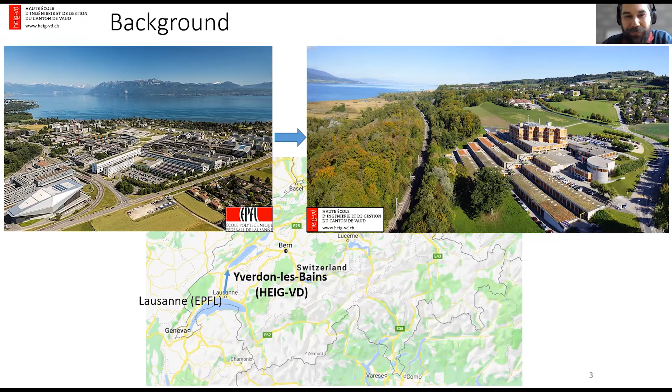Maybe I will start with a small background about geography, so that you can see more or less from where I'm talking today. So if we zoom in this small rectangle, there is Switzerland, a very small country. And if you zoom in again, you have my first affiliation here, EPFL in Lausanne, where I worked about 15 years with Professor Botsis on the border of the nice lake of Geneva. And then I shifted to the next lake north from that place, to Yverdon-les-Bains, here in the University of Applied Sciences in 2018. I moved from a relatively large university to a much smaller one.

Our University of Applied Sciences is actually multiple sites. The one in Yverdon-les-Bains is about 1,600 students, mostly at the bachelor level. But the University of Applied Sciences has a lot of other sites, and totally it's about 20,000 students. Most of our students are coming from a practical background, not necessarily oriented towards research initially, but we go also to master studies and PhD, also supervised PhDs.

I'm working in the Institute of Mechanical Design and Material Technologies, where we are about 10 professors and teachers, about 30 engineers full-time. We work very closely with industry in mechanical design, typically high-speed machines and dynamics, material characterization and non-destructive testing, and more recently, also additive manufacturing, where I also contribute.

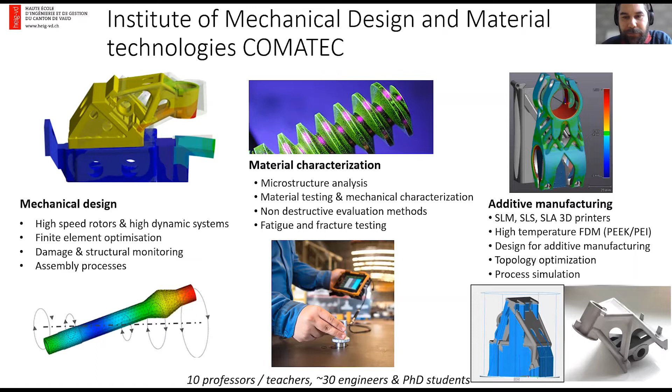Finally, in my group, we are currently 7 engineers working. About 2/3 of our projects are with the industry, so a lot of things that are confidential that I cannot show today. But we work in the field of 3D printing of composites, automated tape layup or in-situ consolidation of thermoplastic composites, also biocomposites, and the topic of today, thin-ply composites and multifunctional structures. We also develop design tools and optimization methods. But that's just the overview of what we are doing.

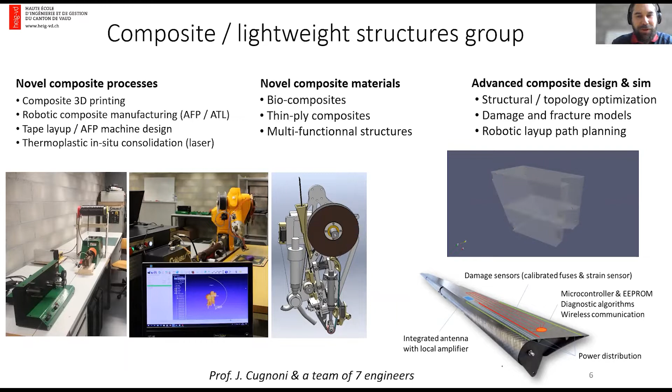Today we are focusing on this topic of thin-ply and multifunctional structures. The presentation will be structured in the following way: we'll have a look at what thin-ply composites are and why they are interesting. We look at their properties, mechanical properties mostly, and how we can model thin-ply composites. Finally, some applications. I will finish with what I see as an extension of this work: development of multifunctional thin-ply structures that can further save weight for weight-critical applications.

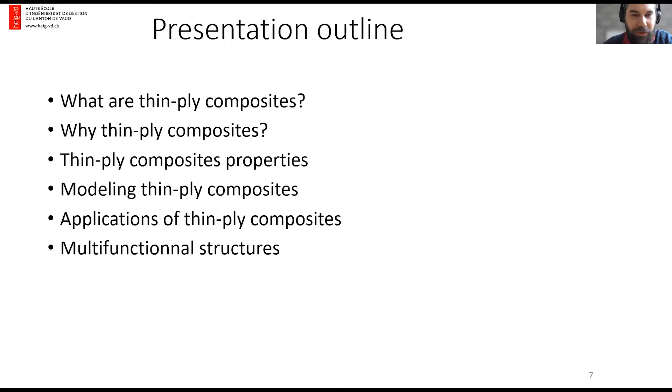So you probably all have seen this picture once in your life. It's the distribution of materials in the latest generation of aircrafts. We can see that in the latest generation of long-range aircrafts, we have about 50% weight of composite in the structure, and with other optimizations, it led to a 20% reduction in fuel consumption. This is a huge step. However, this evolution took about 40 years to introduce that amount of composites in aircrafts.

And the big question, with the need to go to more efficient transportation systems, is: can we go any further in the weight reduction of an aircraft structure, or other types of flying objects, for example? And I think that thin-ply is part of the solutions that we can investigate to achieve that.

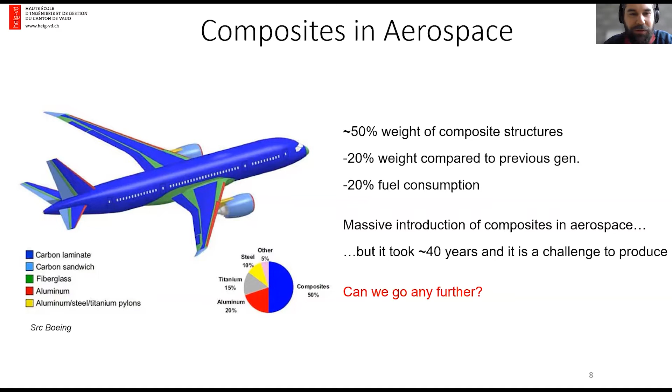And I will try to show you why and how.

So Thin-Ply Composites, first of all, a definition. These are composites made of plies that are typically 30 to 70 micrometer thick, so way thinner than the standard ply thicknesses we can find today in the industry.

Ply thickness can go down to 20 to even 15 micrometer, depending on the material. It's made by advanced tow spreading process, where typically carbon fiber tows are spread very thinly to a few fiber diameter thickness, and then impregnated or stabilized to do non-crimp fabric, for example.

These materials are commercially available, not necessarily widespread, but commercially available. It was first developed in Japan, in the center Fukui, but we also worked very closely in Switzerland with NTPT, North Thin-Ply Technology, which is specialized in Thin-Ply prepregs. There's also Chomarat in France and Oxeon, which are also producing Thin-Ply non-crimp fabrics or woven fabrics.

So the difficulty also when ply thickness is reduced as much is if we handle it as a prepreg or a textile, it's not very stable when we handle it. So it's ideally suited to be used using automated tape layup system and robotic processes, because laying it by hand is relatively difficult.

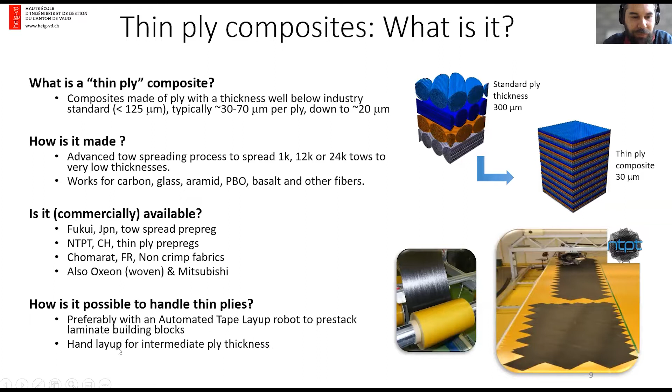But why? Why do we want to reduce the ply thickness? The first and probably most obvious reason is that a thinner ply means a thinner laminate can be produced. And that's typically critical for sandwich structures, for example, in space application, where the skin thickness of a sandwich usually is over-designed.

Usually the skin thickness is more designed based on the symmetry and balance conditions for the laminates, and it might not be critical in strength. So in these cases, which are very frequent, using a thinner ply means simply we can reduce the skin thickness and save weight by a significant margin.

For example, for a thin aerospace sandwich skin, we could move from about 1.2 millimeter thick skin, if we consider a quasi-isotropic laminate, down to a skin of 120 micron or even less, which means very close to paper thin skins, and still symmetric and balanced.

And for another type of advantage based on the design flexibility of Thin-Ply, is that for a given laminate thickness, for example, a load-bearing structure which is several millimeter thick, we can have a much larger design space to optimize the laminate.

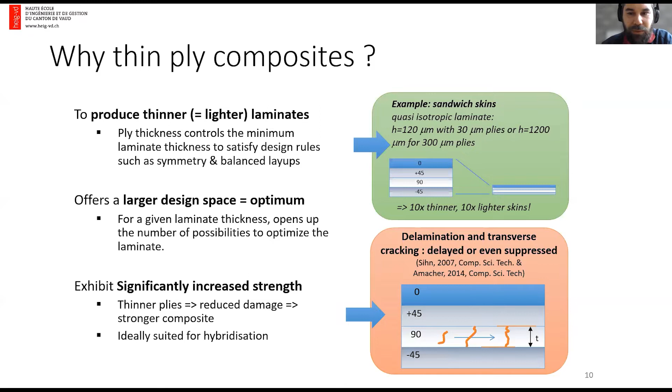And that's probably the most interesting aspect. I will detail this a bit further in my talk. And just to put this in perspective, I would like to present an example of an application for Thin-Ply composite structure.

This is the aircraft Solar Impulse 2, which is the first solar-powered aircraft to fly around the globe. Not in one flight, but around the globe, just propelled by solar power. And it's a very large aircraft. It has a 72-meter wingspan, so it's like a Boeing 747, but it weighs the same as an SUV. It is solar powered with batteries and so on.

So the structure is extremely light, and it is all made of Thin-Ply composites. The main reason to use Thin-Ply composites in this aircraft is that there's a large surface of the structure, so reducing the areal weight is critical.

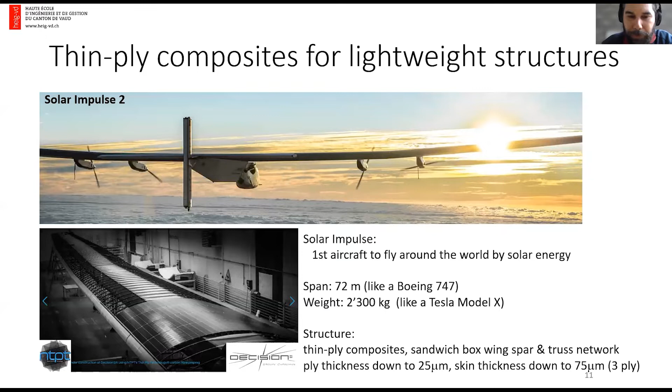So based on my own estimate, I would say that in this design, the skin thickness for a 3-ply layup could go down to 75 micrometer, thinner than a sheet of paper, but made of high strength or high modulus composite carbon fiber. So without this Thin-Ply technology, this aircraft could not fly. That's fairly simple, so that's the first justification of why.

But then there's a much more interesting aspect, which is why Thin-Ply are stronger. First of all, in most composites, the critical first damage occurs in the off-axis plies, usually by transverse cracking, as you can see here. This transverse cracking occurs around 0.3 to 0.5, sometimes 0.7% strain.

However, when you look at the on-axis plies, we can use fibers that have an elongation up to 2% strain. This means that a composite is only safe to be used for a fraction of the maximum strain of the fibers that are used. And that's a pity because we are paying a high cost for high performance fibers, but we are only using about 1/3 of this range of loading that we could use normally.

In regular composites, what we have is after transverse cracking, we have generally matrix cracking induced delamination, and then at a certain point fiber failure.

The use of reduced ply thickness has been shown to reduce the onset of free-edge transverse cracking and delamination. This effect has been described very clearly by the work of Dvorak and Camanho in 2006, where it was proposed to consider that the transverse strength of a ply is not an intrinsic property, but it is an in-situ property.

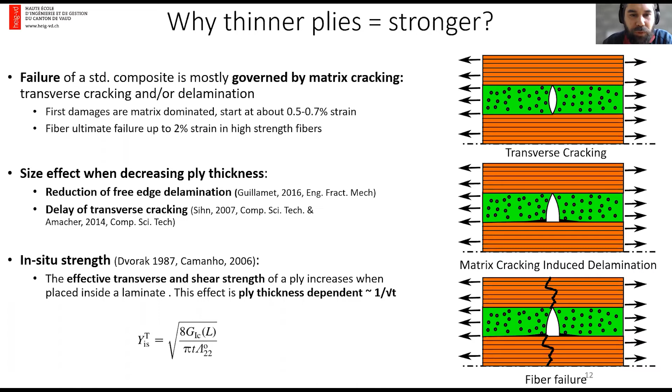But maybe to highlight what it looks like, here are a few videos. You can see here the free edge of a quasi-isotropic specimen during testing. Here a thick ply laminate where the 0° ply is in the center, and the 90 is here. At about 1/3 to one half of the test, we have transverse cracks that very quickly migrate into delamination, and finally a lot of delamination. At the end of the test, only the 0° ply remains loaded.

All the other plies are, let's say, fragmented. For an intermediate ply thickness, so 134 micrometer per ply, we can see that for most of the test there's not much happening. At about 50% of the test, we have the appearance of the first transverse cracks, but very limited delamination. We have a higher density of transverse cracks that develops, and finally some intralaminar cracking and delamination close to the end.

And for the thinner plies, I will speed it up because not much happens. At more than 50% of the test, we still don't see any damage. Finally, we see some transverse cracks. Close to the end of the test, we see a very sharp increase in crack density of transverse cracks, as you can see here.

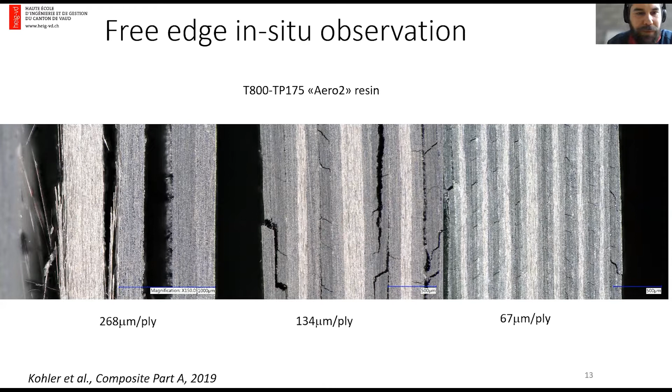And we can also observe this through acoustic emission monitoring. If we use acoustic emission probes and monitor on the horizontal axis the acoustic energy emitted by the composite, and on the vertical axis the stress applied on the composite, we can observe that for thick ply laminates, quasi-isotropic, the onset of acoustic emission is about 300 megapascal applied stress, and acoustic emission raises very quickly at around 500 megapascal and stabilizes here. This corresponds to the propagation of delamination, and the first onset corresponds to the nucleation of transverse cracks.

While for intermediate ply thickness, 100 micrometer plies, or thin plies like 30 microns per ply, we can observe that the onset of acoustic emission is much higher, more than twice the value of the onset for the thick ply. And we don't have much acoustic emission before failure. So this is exactly what we have observed in the videos, but seen from the acoustic emission standpoint.

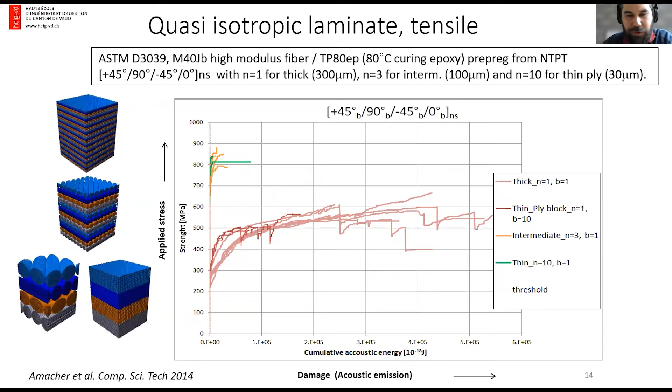If we report these different test results for different ply thicknesses, these are quasi-isotropic laminate tensile tests. We have here in dashed line the onset of damage, so the onset of acoustic emission, and in continuous line the fracture, so the failure strength of the laminate.

We can see that for the thick ply, the first onset of damage is very early, at about half of the strength of the laminate. While when we decrease the ply thickness, the onset of damage increases significantly. We reach 600 megapascal, which is actually the strength of the thick ply, and the failure strength also is increasing.

By reducing the ply thickness, we have actually convergence of the onset of damage and the strength of the laminate, which means that there's no significant damage occurring before the final failure of the laminate.

What is also interesting is that if we compute the strength of the laminate based on classical laminate plate theory, considering no damage and considering that failure occurs when the 0-degree ply fails, we reach exactly the values that we've tested. This means that we can reach the theoretical strength of a laminate if we use sufficiently thin plies.

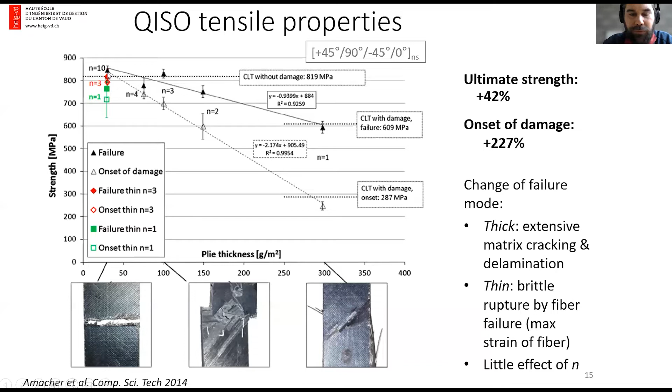So this is very interesting. We also verified this with many other composite formulations using aerospace grade resins and higher modulus fibers, lower modulus fibers, high strength fibers, many different kinds.

And what is interesting is that in the best systems, by decreasing ply thickness, we could always reach a point where the onset of damage and the final failure are very close.

For example, here for this T800 intermediate modulus fiber with an optimized resin system, we could reach a strength for the quasi-isotropic laminate that was about 1.1 gigapascal, and an onset of damage which was higher than 1 gigapascal, which means a very, very high onset of damage.

The onset of damage is very important because below the onset of damage, the composite is safe to be used in cyclic loading. And this onset of damage defines also the fatigue limit of the laminate.

So this means that by having such a high onset of damage, this structure made of this material could sustain very high stress cycles at a stress level of 1 gigapascal, which is very, very interesting.

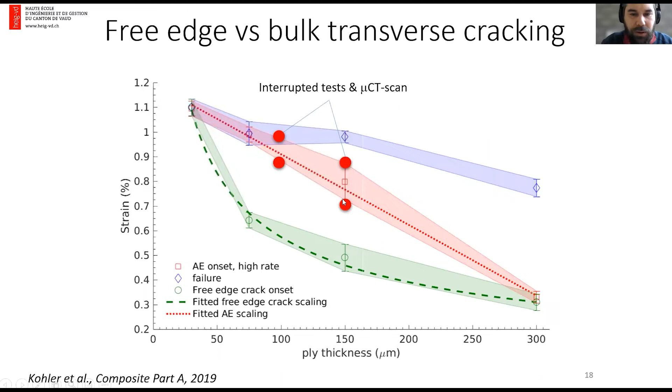While just after the onset of acoustic emission, the composite is full of transverse cracks and also some cracks in the 45-degree plies. So you can see that the onset of free edge delamination corresponds to very small cracks that don't go in depth, while the onset of acoustic emission really corresponds to what happens in the bulk of the material.

So if we look at this graph, we can see that first we have these free edge cracks that appear. You have seen them in the video before. Then we have the acoustic emission onset with transverse cracking growth in the bulk of the laminate. And finally, we have an increase in crack density in the bulk, and finally potential delamination, some limited delamination, and then fiber failure.

By decreasing the ply thickness, we not only shift the onset of free edge crack appearance, but also we shift the onset of propagation of these transverse cracks in the bulk of the laminate. And finally, for the thinnest ply, we couldn't even observe free edge crack before the final failure of the laminate.

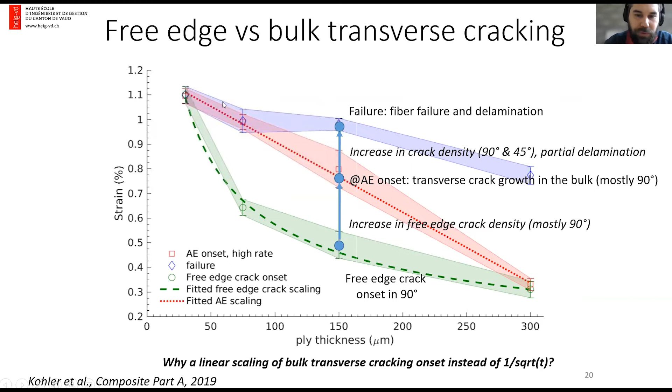So this is very interesting, but this difference between the free edge and bulk behavior is a bit difficult to understand. So what we did to try to analyze this is to model

Thin-Ply in a multiscale manner by discretizing the microstructure of a transverse ply here with each fiber modeled from a micrography, with cohesive interfaces between the fibers and the matrix. The matrix itself is a Drucker-Prager plasticity model with damage. And the neighboring plies are modeled as continuum elements here to model the constraining effects of the neighbors.

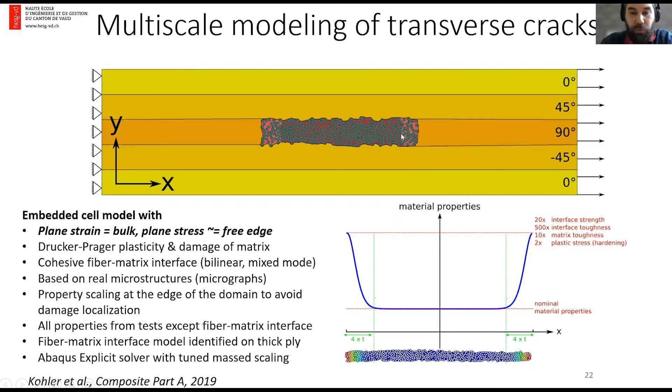And we did this simulation with two types of conditions. One is a plane strain condition in the out of plane here, which is the condition that develops in the bulk of the laminate. And the other condition is the plane stress condition, where we have zero normal stress, out of plane stress, which corresponds to the free edge approximately.

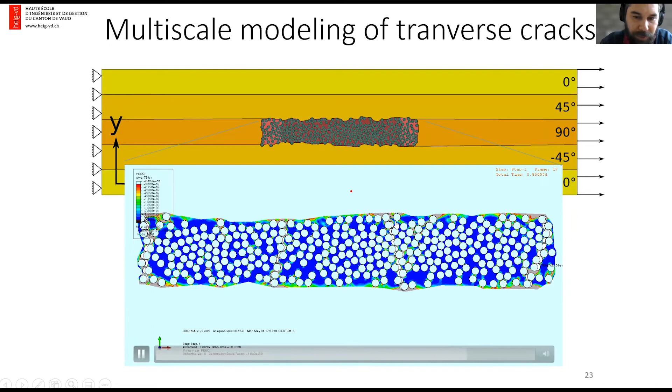And by running this, we can have a look at the damage progression. So during the simulation, there's not much happening in terms of plasticity here. And then at some point we have nucleation and coalescence of small plastic damages that create cracks, transverse cracks.

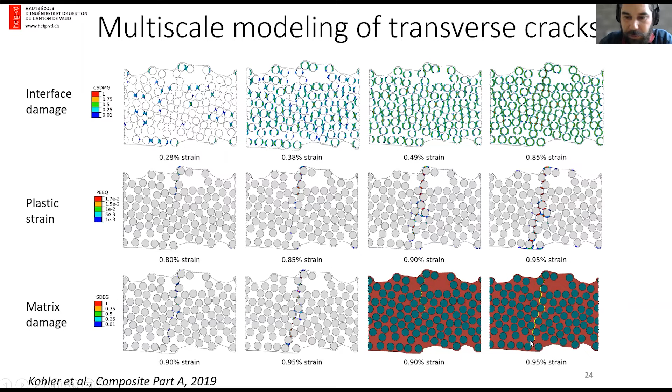So if we analyze this, in the first regime of the simulation for intermediate ply thicknesses, we mostly have distributed degradation of the fiber matrix interfaces. Then we have strain localization with plastic strain that develops in preferred bands here. And these plastic strains lead to matrix damage, so degradation of the matrix, and finally coalescence of a full crack at about 1% strain.

So using this model with the plane stress and plane strain assumptions, we could actually replicate properly the onset of free edge cracking and onset of bulk crack propagation here for different ply thicknesses. And this shows somehow that this is the same mechanism, but just the effect of constraint is different at the free edge by suppressing the out of plane stresses, so the out of plane constraints.

Free edge cracking appears first because there's less constraint on the plasticity of the matrix at the free edge. So that explains the mechanism from, let's say, its root cause.

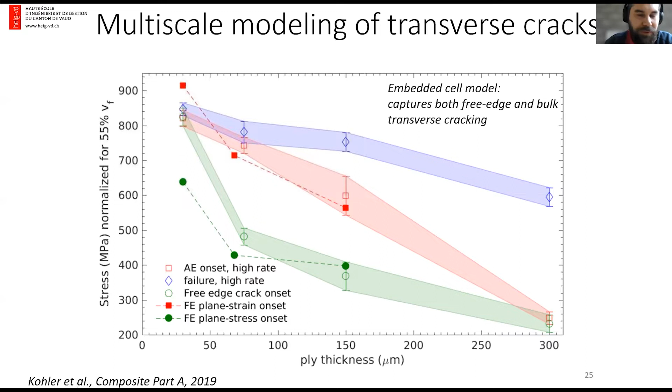And finally, how to model this in terms of design. We cannot use these kinds of models for design. So we used several approaches in the past, but the simplest one is just to use the principle that transverse strength of a ply in a laminate is a function of the ply thickness.

So we just have to calibrate somehow what is the in-situ strength of a ply, either from a test, like we did, for example, a quasi-isotropic test with acoustic emission monitoring. And from this, we can determine what is the effective strength, transverse strength of the ply, or also in-plane shear strength of the ply as a function of the ply thickness.

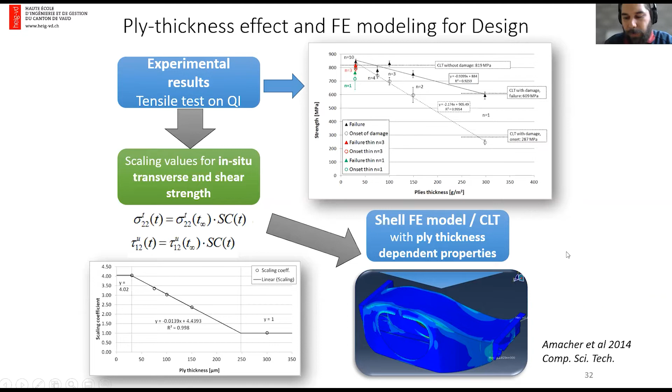Then introducing this in a standard shell element with, for example, Hashin matrix failure criteria can work to predict the performance of Thin-Ply fairly well, at least until the onset of damage.

Here we did simulate many different conditions, like an unnotched tension test, a notch open hole tensile test, and open hole compression for different laminates using simple shell theories. And we can see here that

for the prediction in the thick ply, actually, the models don't match very well with reality because a shell model does not account for delamination. And while we reduce the ply thickness, we can see that the simple shell models are actually more efficient at predicting the performance than they are for thin ply than they are for thick ply.

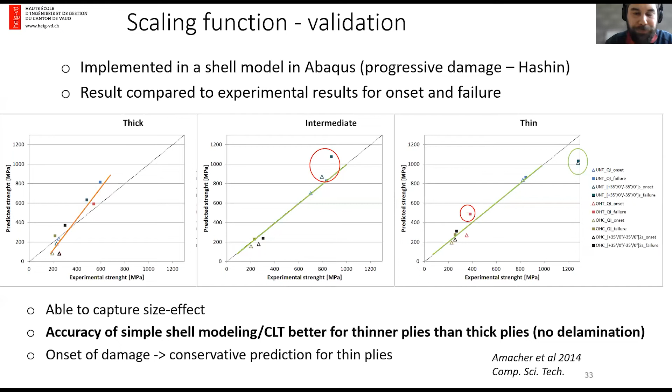So that's a good sign because it means that you can use classical laminate theory or shell modeling more accurately with thin ply than for thick plies, just because there's no delamination. So there's no need to change our design methods. We just have to adapt for the in-situ effect on the transverse tensile strength. So we use this in several applications.

We present one example here, done in collaboration with RUAG, Airbus, and other partners. This is the redesign of a lightweight aileron for an electric aircraft. The focus was to save weight and to be fast and cheap to produce. The main idea was to avoid using a large-scale 3D mold for this aileron, which is about 2.8 meters long and has to weigh about 3 kilograms.

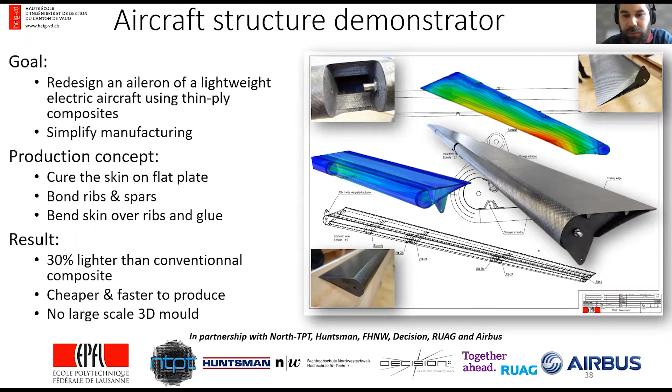We did a complete redesign of this aileron using the same method described before, so shell modeling with in-situ strength failure criteria. We used the flexibility of thin plies to control local buckling by using higher modulus fibers, which increases the local buckling limit. Because of thin ply, we don't have the usual drawback of using higher modulus fiber, since we don't get delamination. In general, using higher modulus fiber is limited by delamination, but for thin ply it's not really an issue.

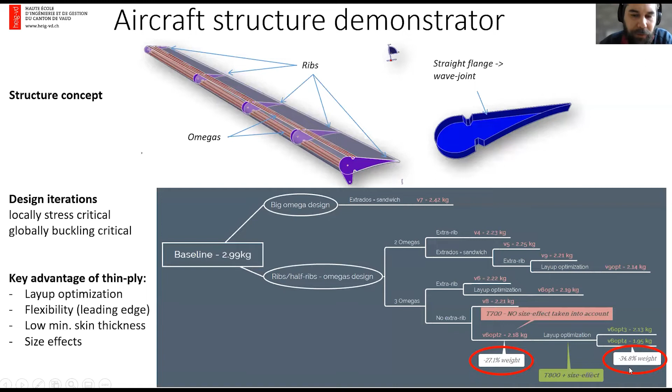By using a lot of different tricks like this, we could save weight by even more than 30% compared to the initial design. One trick used to simplify manufacturing was the flexibility of the thin plies. The skin thickness is very thin, in some areas less than 1 millimeter. We cured the outer skin of the aileron on a flat mold, then formed it elastically after curing onto the ribs, using adhesive bonding and some clamps to close the aileron. This shows you can use the elastic flexibility of the ply to form an aileron after it has been cured.

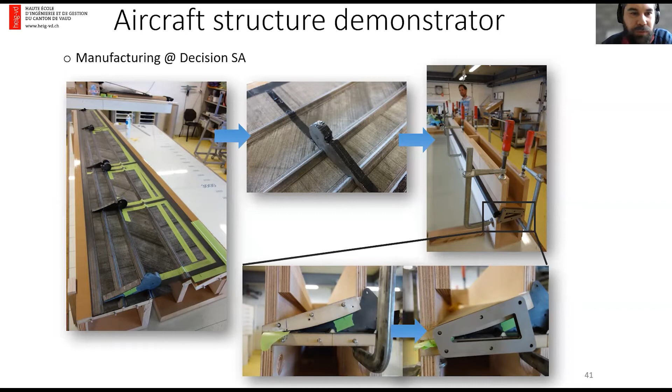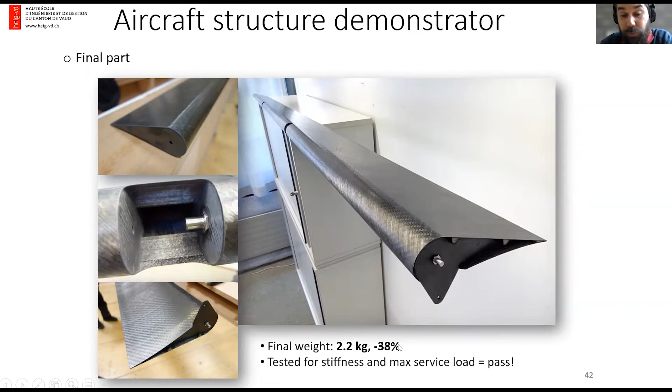We checked it in terms of mechanical testing, and it passed all the criteria - clearly a pass. In the end, we saved 38% weight. This is a very interesting aspect, but we can go even further when we think about lightweight structures.

We can think about UAVs, high altitude platforms, or satellites. In these structures we have not only the structures themselves, but also active components: antennas, sensors, monitoring elements, solar panels that have to distribute power to different components and so on. This reflection sparked the idea of why not try to merge Thin-Ply Composites with multi-material inkjet printing to produce a multifunctional structure.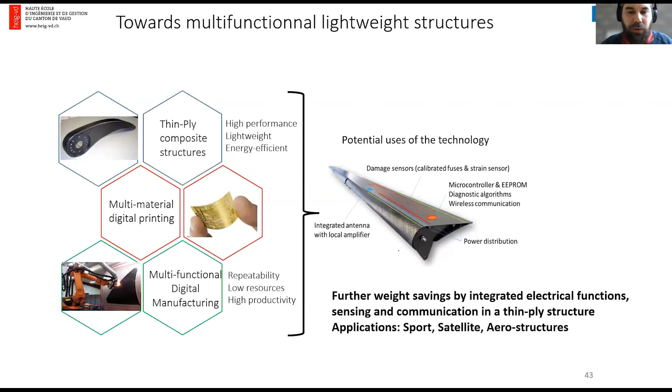The main motivation is to remove wire harnesses in lightweight structures and have all the electrical signals going through the skin of the composite. This is not as simple as integrating a flexible PCB in the structure, because we don't want to affect the strength of the structure. So we have to use a printing substrate for the traces which is also a structural component.

We developed this concept in a recent project, where we 3D print using inkjet on a composite substrate, a very thin GFRP isotropic laminate about 50 microns thick. Using inkjet printing, we produce traces that have to be sintered to be conductive. Then this pre-cured, pre-printed circuit is integrated into a pre-preg laminate as an interlayer, or on the top or bottom surface, with a thin layer of epoxy adhesive film. Finally, we cure the composite using autoclave curing, for example.

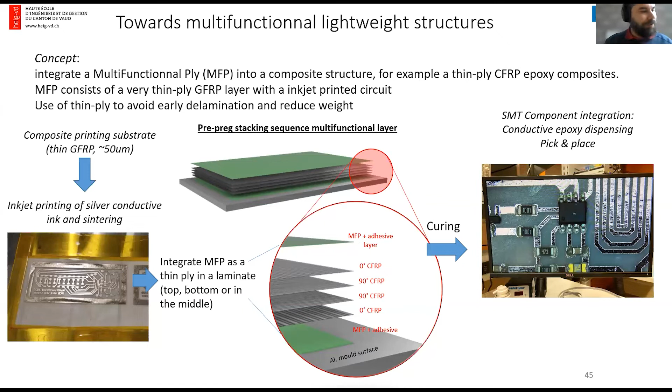In the end, we can integrate components using surface mount technology, typically using conductive epoxy and some pick and place techniques. Here's a small example - this is a printed circuit on a very thin GFRP substrate that has been prepared to maximize adhesion with a pre-preg. You can see the circuit - it's a simple LED dimmer with a capacitive touch sensor, and we can change the brightness of the LED. That's a very simple physical demonstrator, but this component can then be integrated into a real structure.

The main question when we integrate this into a structure is: do we lose strength of the laminate by integrating an active layer like this? So we looked at the different failure modes. One critical failure mode is the loss of electric signals, because if it's a critical signal we cannot lose it, or we lose the aircraft or UAV. We did fatigue testing of printed layers in 3-point bending and also static testing in tension. We observed overall that the traces are actually stronger than the laminate we were using, so we didn't see any degradation before the composite failure. We have limited sensing ability, so these kinds of traces are not really good for sensing - they are optimized for signal transmission and power supply.

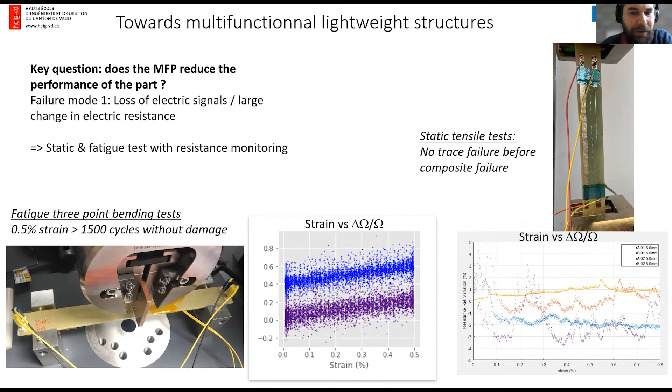Another failure mode could be delamination, because we introduce a pre-cured layer inside the pre-preg laminate. So we did some DCB testing using a zebra pattern, where we have this multifunctional ply, and every 30 millimeters we print a trace, considering different trace widths. Then we measured the interlaminar toughness using DCB for all these specimens.

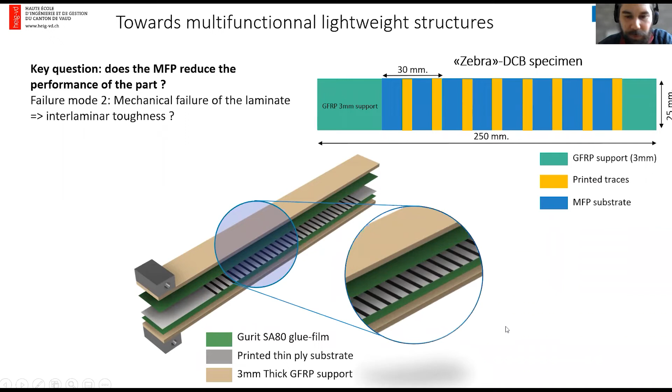Here you have the load displacement profile during the DCB test. The blue curve is the raw specimen - not just GFRP, but GFRP plus one layer of multifunctional ply without printing, so just the substrate itself. For printed traces, we have these different curves below, and we can see that printing on these multifunctional plies decreases the load capacity of the DCB specimen quite a bit, which is linked to the reduction of the fracture toughness.

Here you can see the average toughness, or critical energy release rate, measured for about 50 millimeter crack growth. For the raw specimen, we are reaching 1,400 joules per meter square, which is what we would expect for a GFRP composite, while for the printed traces it is much lower, in the range of 500 to 600 joules per square meter.

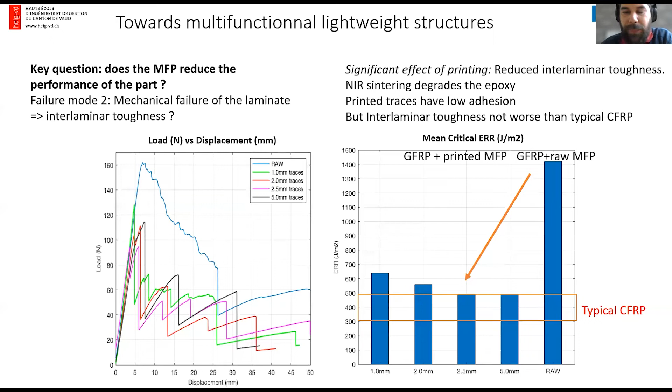This is lower because we have to sinter the silver ink. These are nanoparticles that have to be sintered at high temperature, and we have observed that it slightly degrades the epoxy and lowers the adhesion. The printed traces also don't stick very well, so they are like weak spots in the structure. However, this critical energy release rate is still better than the typical toughness of a CFRP laminate, so it's not really a weak point overall.

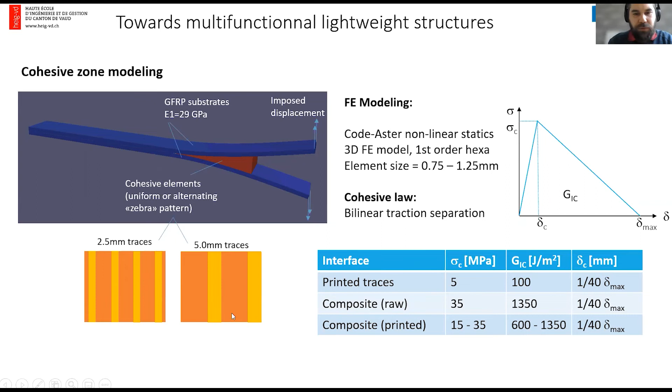To evaluate this, we did some cohesive modeling, modeling each region differently - cohesive interfaces for the non-printed part and cohesive interfaces for the printed part. We played with the different parameters to identify the properties, and we could match the experiment. What's interesting is that in the experiment, we have a load jump every time we reach a printed trace, and in the FE simulation we see the same behavior: unstable crack growth when we reach a printed trace, and stable crack growth in between. This is just to show what we can do.

Now we are actually using this technology to develop demonstrators with industrial partners. I cannot show them here, but I hope I will be able to do so in the future.

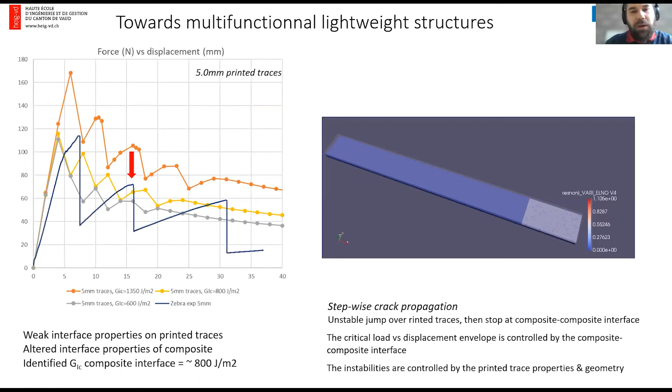I hope that with this presentation I've shown you that using Thin-Ply can actually open the design space for lighter structures, and that we can use very thin GFRP plies as a printing substrate to introduce multifunctional aspects in lightweight structures. I'd like to thank you for your attention, and I'm ready for your questions.

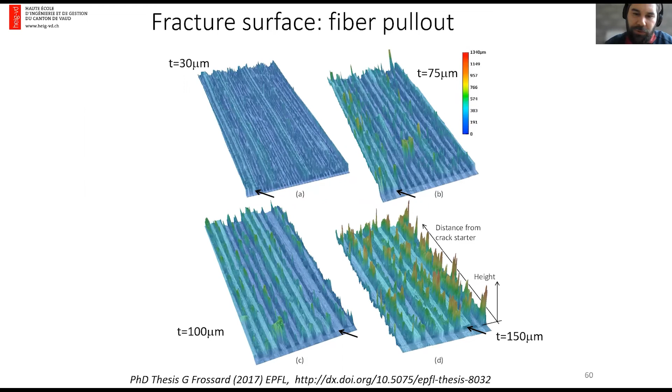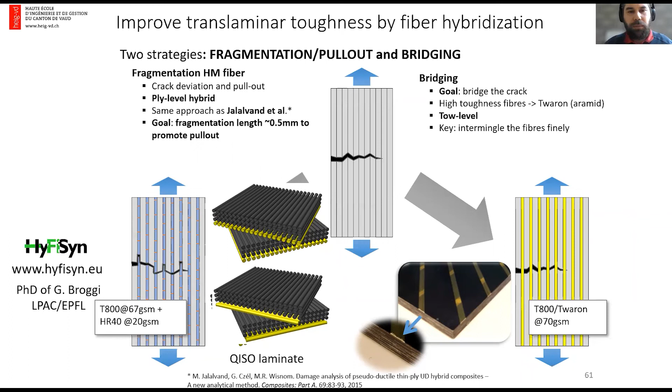However, this brittleness can be linked to the pull-out length during the fracture, and this pull-out length can actually be restored using hybrid fibers. That's the subject we are working on now with the PhD of Guillaume Broggi in the HyFiSyn European project, where we use two types of fibers, one with a lower strain to fracture and another with a higher strain to fracture, in order to promote pull-out. With this, we can restore at least partially the disadvantage that we have with Thin-Ply. It's still work in progress, but that's one way.

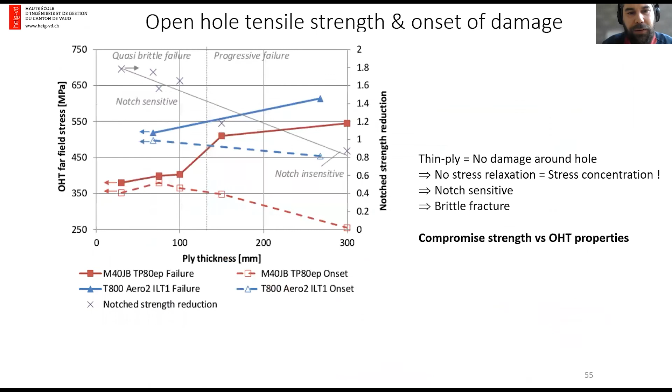And for transverse loading impact, we can reach fairly good impact properties and compression after impact properties with Thin-Ply. However, it has to be tuned, so we need to use interlayer toughening to reach very high values because we don't have much delamination. So we tend to have early fiber fracture, which is not a good type of failure mode to have in impact loading.

So some other people, like a group in Girona and also in Porto, are working on hybrid ply thicknesses, where they use different ply thicknesses through the thickness of the laminate, so that they can localize a controlled delamination during impact in order to still have delamination, but not too much.

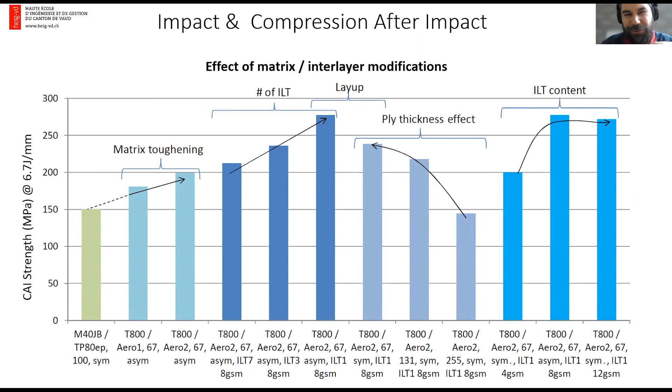Excellent. All right, Gilles, do you have a question?

Yeah. Hey, Joel, good evening. How are you doing? Hey, good. Hi, Gilles. Yeah, a quick question. Very interesting presentation, Joel, very nice to see.

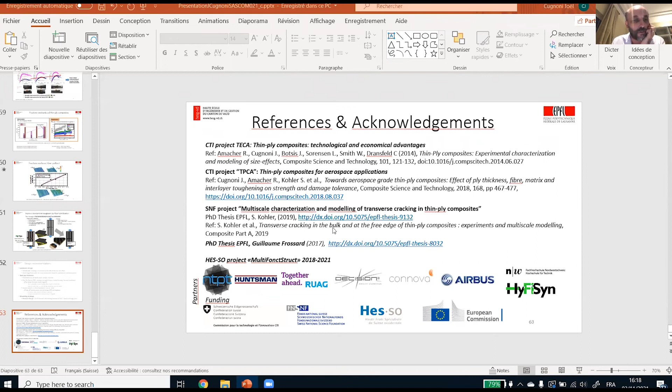Quick question to highlight: on page 17, slide 17, you show this very interesting graph in which you normalize by thickness, but there is also the ratio of anisotropy in this, E1 divided by E2. Yeah, it's this one. Yeah, this one.

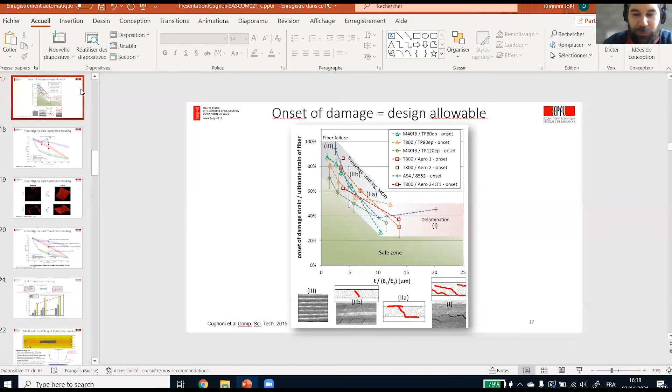So just for my understanding, to make sure I understand everything, that means if I work with carbon fibers, I go more towards the left, right? That means carbon fibers are going to be better in Thin-Plies compared to something that is more isotropic, like glass fibers or polymer fibers. So all this is due to the confinement effect, right? Due to the fact that with very stiff fibers, you maximize the confinement. So exactly, that means if you want to really get advantage of the Thin-Ply technology, you need to go for stiff fibers. Yeah, or you can state it also the other way around: if you want to use high modulus fibers, you really have an incentive to go to Thin-Plies.

Yeah, so that's why it justifies what you were discussing about cost and everything. That means this is not something you can do with cheap, more isotropic fibers or things like this. Yeah, okay, no, I don't think it's... let's say the benefit will be elsewhere. It would be more like, for example, more about the flexibility of the design and so on, but not really in the performance.

No. Yeah, good, thank you, Joel. Thanks. You're welcome.

So will there be any questions from the audience? If the audience have some questions, you can write in the Q&A.

There's a question about whether the brittleness of thin-plies can be reduced if we are using a thermoplastic matrix. Yes, there's a reflection about using thermoplastic for thin-plies.

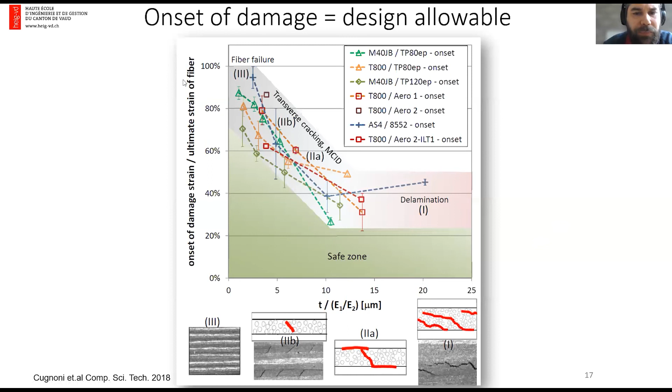So maybe there's something I can show here. You see this gray curve. This is a carbon epoxy system where the epoxy matrix was not toughened, so it was a raw matrix without any toughener inside. This high temperature epoxy is very brittle, doesn't have good fiber-matrix adhesion, doesn't have good ductility, and you can see that in this case there's no ply thickness effect.

I would imagine that in some thermoplastics it could be the same because of the weak fiber-matrix interface. However, if you have a very good fiber-matrix adhesion, then you'll be dominated by matrix plasticity, and then the behavior will be restored, like the one we observed. So that's my guess, but I've never tested it.

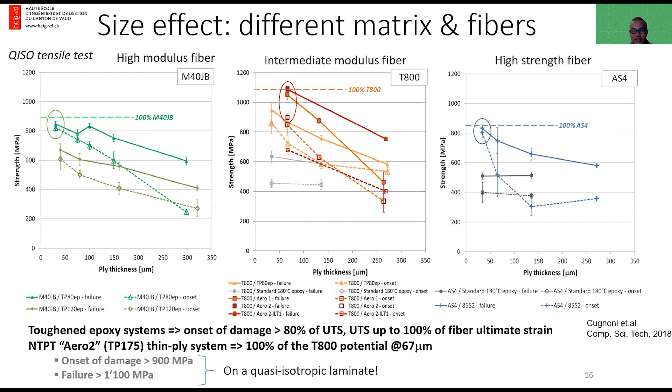I think it's really good for all of us to learn about thin-ply composites, which is recent technology in composite materials. So I hope you get the benefit of knowing the advantages and disadvantages of these thin-ply composites.